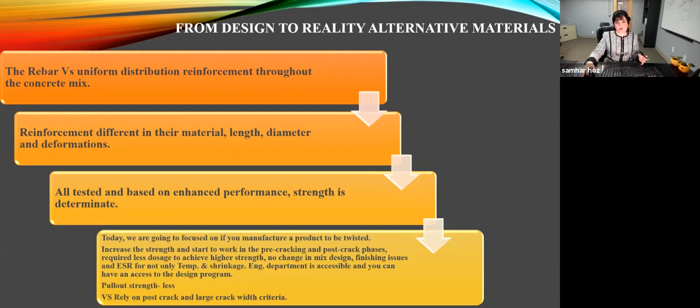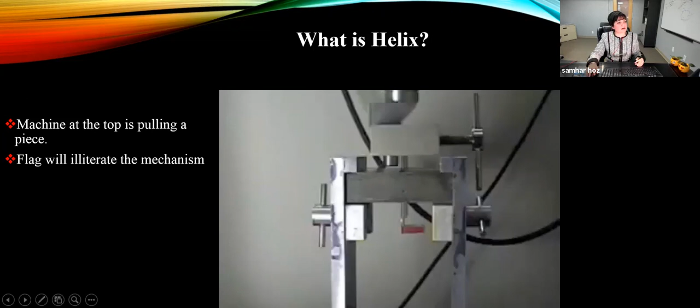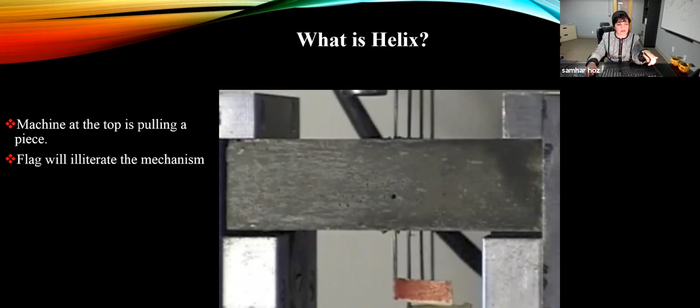So we're still with what is Helix - let me show you quickly here. This is a video with a concrete beam, and the machine at the top is attached to one piece of Helix, and the machine is going to try to pull Helix out of the concrete. The flag at the bottom is actually attached to the same piece from the other side, so you can see the flag turning as the product untwists and is pulled out of the concrete. Remember, this performance is for one piece - typically you have more than 11,000 pieces per pound.

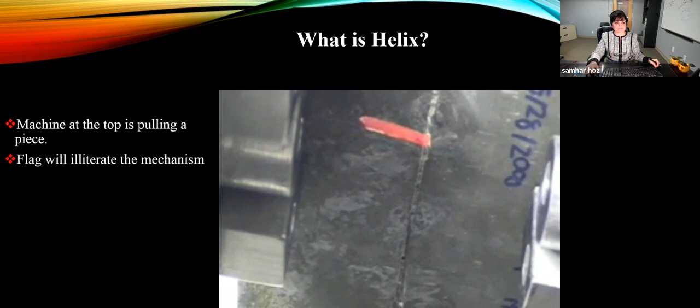So how does Helix affect concrete behavior? As I mentioned before, I'm originally a rebar designer, so this slide is key for me to modify my way of thinking in reinforced concrete with Helix. The drawing on the left shows the conventional section, and the drawing on the right is Helix reinforcement.

Conventional sections do not behave as a true composite system since concrete must first crack before reinforcement becomes active. On the other hand, Helix performs as a composite system with the concrete - adding a quantity of Helix distributed throughout the concrete section provides a multi-directional reinforcement network and creates a ductile system. This significantly changes the failure mechanism of concrete from sudden, brittle failure resulting in complete damage to the concrete, into a ductile system that's more resistant to cracking and localized damage.

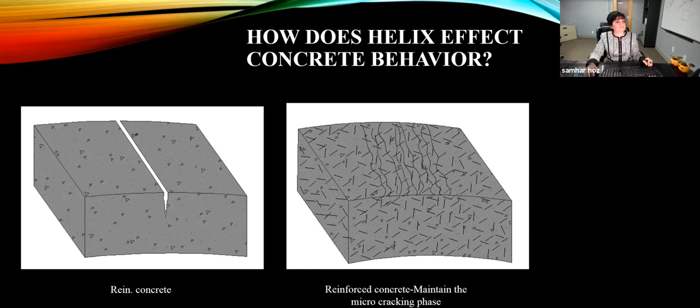So for structural performance, you get a sense that the more Helix you add into the concrete, the more strength you will get. You'll get increased flexural capacity, increased first crack strength or modulus of rupture of concrete, durability and toughness, and of course a lot of increase in shear strength. This increase in all of those aspects results in a better performing, long-lasting concrete structure.

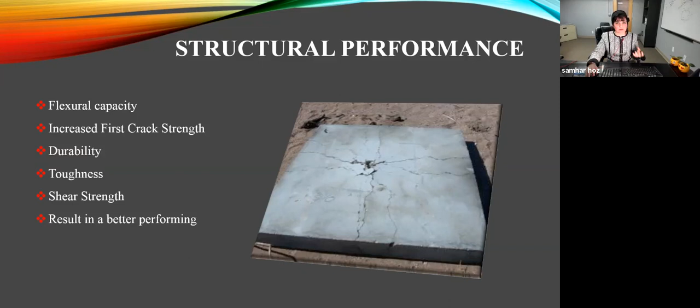So where can Helix be used? It has been used for many years now, in commercial construction, residential construction, transportation, and public infrastructure, whether it's slab on grade, slab on deck, bearing walls, shear walls, foundations, continuous footing and pad footing, cast-in-place walls, transportation, airports, and of course a lot of precast and stormwater retention.

Here we have a bridge deck replacement in Missouri, James Madison University Stadium in Virginia, and a wind farm with our partner in Australia.

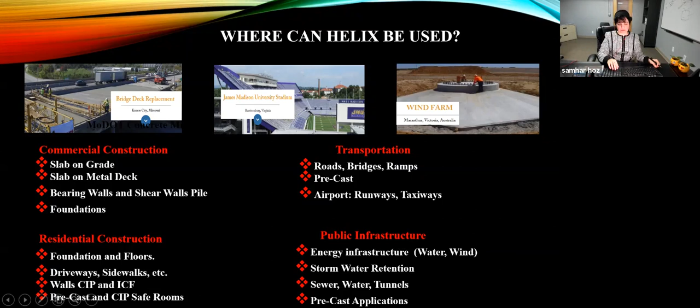All right. Too loud for you, let me know, okay?

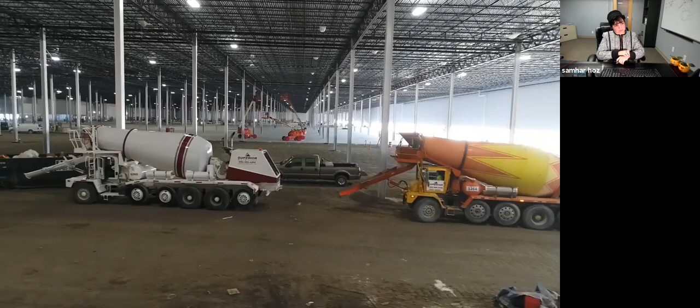Helix has been used to replace all the mesh and rebar specified.

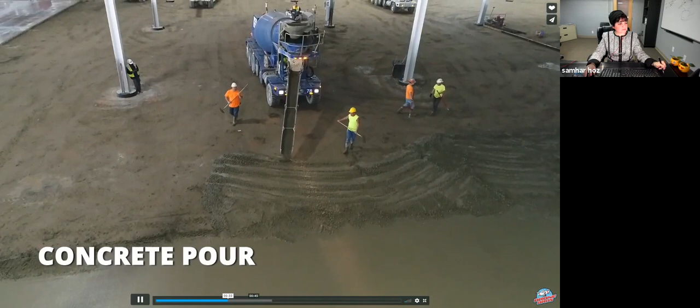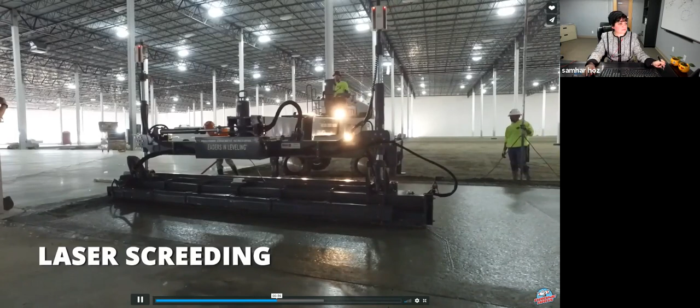Now I get a lot of questions about finishing with Helix. You can see the whole process here. Helix is a dense material, just like aggregate, so as long as the best practices for finishing plain concrete have been followed, Helix is going to sink a little bit, just like aggregate, and there will be a thin layer of cream that develops at the top and covers the Helix, just like aggregate.

Now for this project, we kept joint spacing the same, typically based on ACI 360. It's like 2 to 3 times your concrete thickness, but we can provide extended joint spacing if you want to.

Actually, I went to the actual job site. It was really interesting to be in.

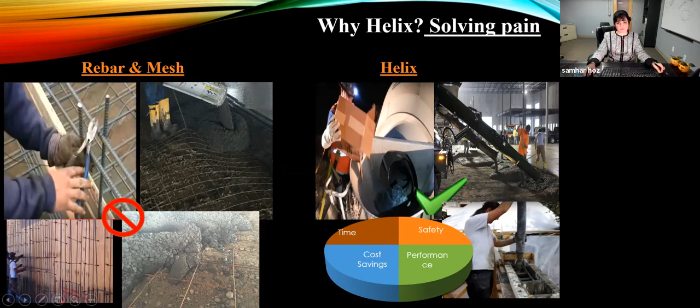So let's look at this quick video about Helix users.

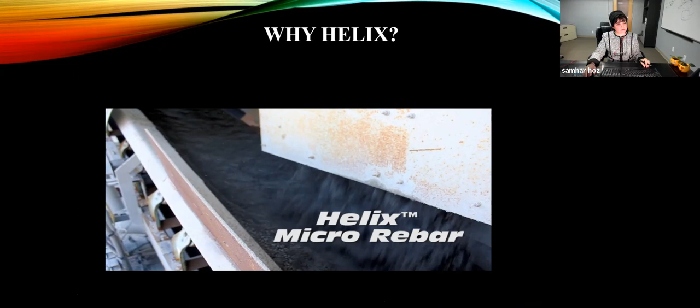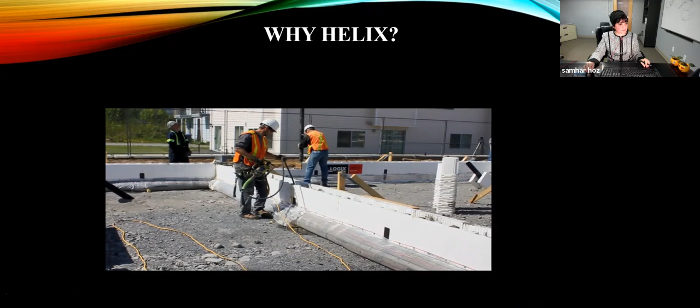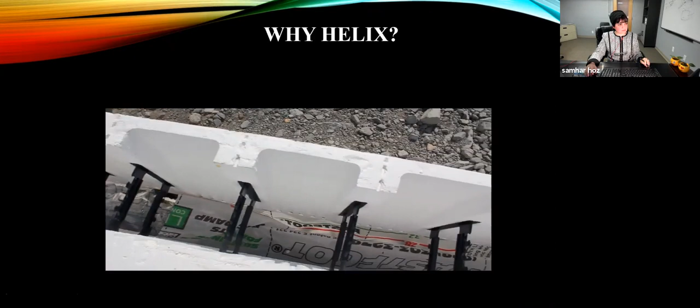Hi, I'm Bob Deeks with RDC Fine Homes, and we're here in Squamish at the Valkyrie's townhouse site. What is really exciting today is that this is the very first time the construction industry in British Columbia is using the Helix steel additive. What that has done for us is we've been able to eliminate about 90%, 95% of the rebar in the forming process, and it's actually significantly reduced our cost. So we're very excited about this opportunity, and we're looking to use this system for all our work going forward.

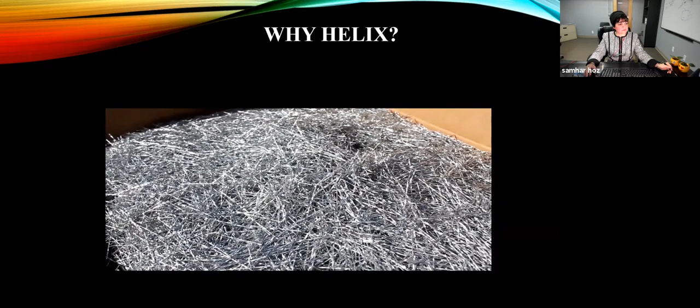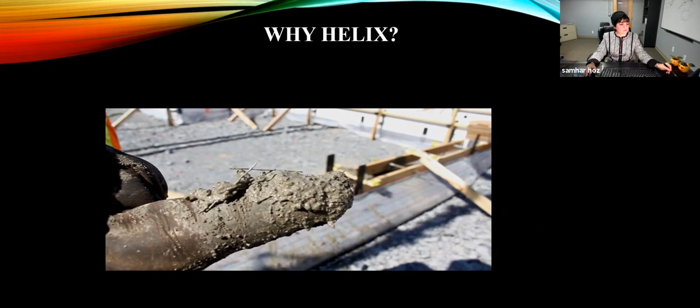Helix is actually a micro rebar. It's metal wire that's twisted, and it acts identical to rebar in concrete. It's 245 KSI steel, extremely strong. The nice part about Helix is it adds reinforcement to the concrete even before the concrete wants to crack. The reason is Helix actually makes the concrete flexible. At higher dosages of Helix, you can actually flex and bend the concrete without a dominant crack forming. That way, in an earthquake environment, with the building shaking back and forth, the concrete has a lot more drift capacity before it reaches a failure mode.

A lot of times, if the rebar is in the wrong spot, you've lost more than half of your strength in the wall. Helix solves that problem totally. The reinforcement is from side to side, top to bottom. It's all the same. The wall is as strong as it could possibly be.

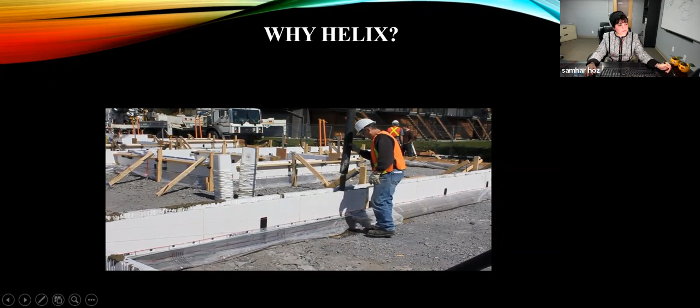My name's Rob, I'm from Coquitlam Concrete. We're loading this Helix fiber in the loads today.

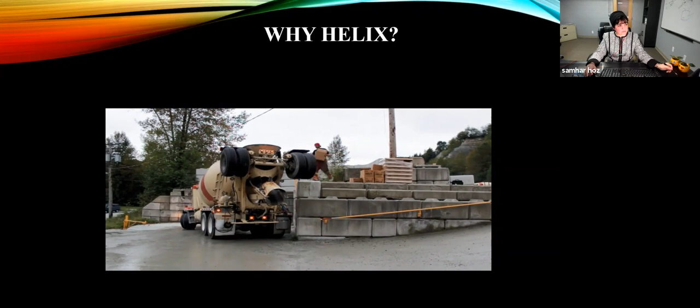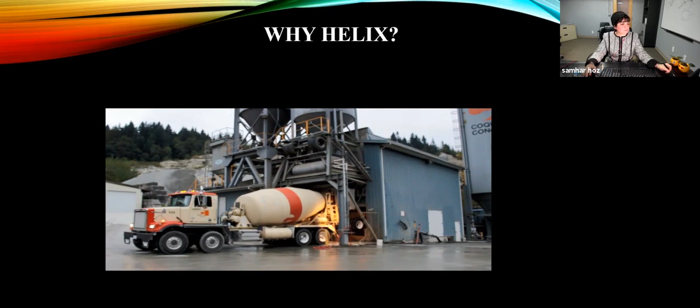What we're doing is the driver's going out to our transfer wall, the fiber's getting put in the truck, then we're adding in the water to the load when the truck's under the plant. The truck's then mixing up for 6 minutes just with the water and the fibers. Once that's complete, we tell the driver to wind it up and we load the concrete into the truck as we usually do. The driver goes to the rack and slumps it up, and that's it. Then they're good to go.

Hi, I'm Rick, and we're going to go through some of the mixing instructions later on. I'm from Summit Concrete, I've been doing concrete for 30 years, and today we're just placing 35 meters of concrete.

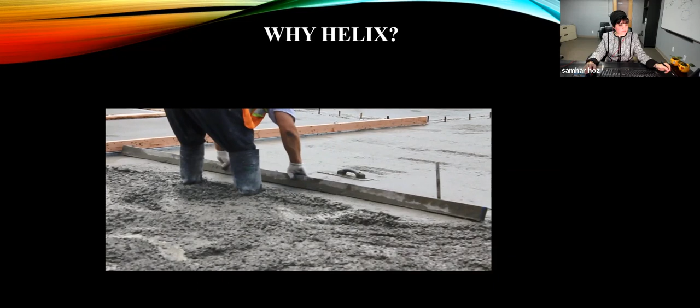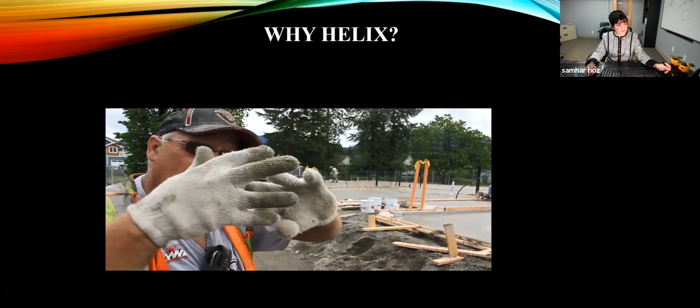Well, that's the thing, like a job like this, normally you'd come up and there'd be a wire mesh, like a 6-inch grid. While you're placing, you try and pull it up, and a lot of times it just gets stomped down to where it's ineffective, it's not doing anything. I can see how the strength of it is going to be more beneficial than a wire mesh. Wire mesh is just going to be running in one line, where this is going to be creating all kinds of different reinforcing.

It hasn't affected us in any way of placing, doesn't seem to be affecting us any way of finishing. So yeah, it's a good product, really good.

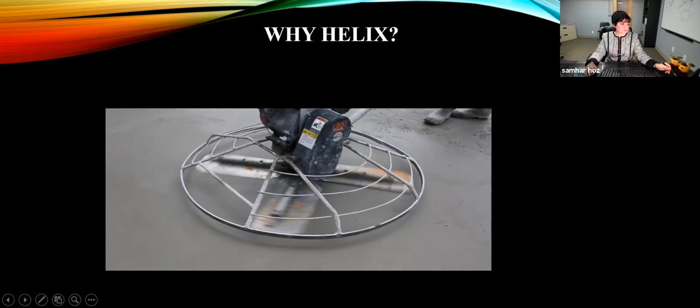For all of those projects, we typically involve our Helix engineering department in the design process. We have a great sales team who will follow up with any meeting required in between up to the construction process. The Helix micro rebar replaces the conventional rebar on the wall.

Their engineers write an equivalency for that rebar, and it's simply a fine mesh of helical twisted, small little twisted bits of metal that are interspersed throughout the foundation system at about, I think it was 25 pounds per meter. So there is no grid of rebar on this wall, there's just the Helix micro rebar.

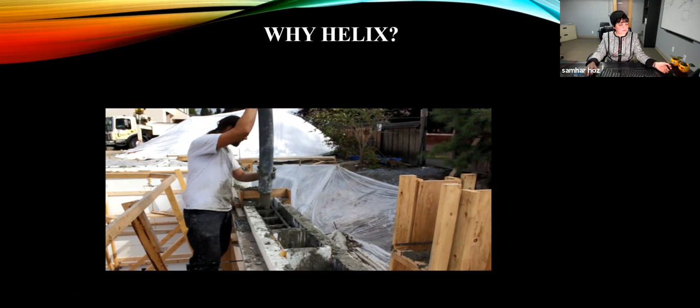We have done some conventional rebar around door openings and window openings that are over and above that 16-inch grid, but it was maybe 500 linear feet of rebar that went into the wall.

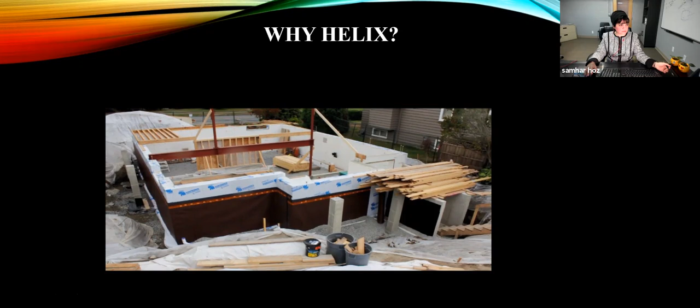The Helix micro rebar does have a cost to it, but I figure, and this is an estimate, that we probably save 20 to 30% on our rebar install, and a lot of wear and tear on our guys, which is important to me as well.

No rusty hands, no rust in your cuts, no infections, no tie wire tearing your skin all up. So guys go home refreshed, they're not as beaten up at the end of the day, and they're able to work that much better the next day, sort of thing.

We used a Helix mix in the concrete here.

Typically to tie the rebar in something this big, there's 160 feet of 12-foot high wall, would take 2 days for 2 guys. So that is taken right out of the picture altogether with the Helix mix.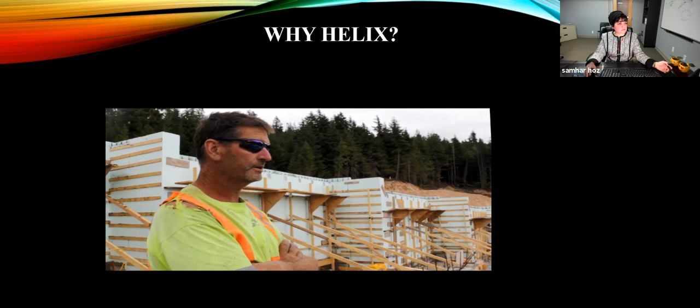It's just a super system, super time saver, and from a business standpoint, that's what it's all about. So I just look forward to keeping going on doing this and not going home tired at night. All right.

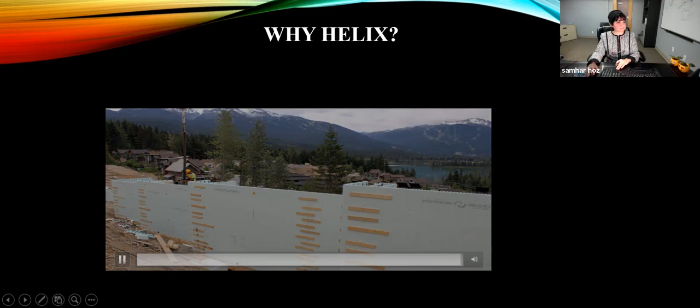You don't want to hear them again.

All right, so how does Helix resist corrosion? And that's the typical question I get each time I do a presentation.

As we all discussed, Helix reinforced concrete creates a ductile concrete matrix and has the ability to resist, to carry load prior to concrete cracking.

This mitigation of cracks in concrete prevents corrosion altogether, since this limits the availability of moisture, which is essential to sustain the corrosion. Now, if concrete undergoes cracking in an extensive environment, moisture may enter the concrete and contact with the Helix. As I mentioned before, it is zinc, which acts as a sacrificial anode to electrical current.

So the zinc coating will corrode first, which protects the rest of the steel from damage. This allows the integrity of the Helix pieces to remain intact.

Now, the last two factors for defense are the small size and the discontinuous nature of Helix, which allows for possible corrosion to occur in extensive environment in some of the pieces without resulting in spalling of concrete, as shown here, since the volume of steel is not large enough to allow the volume increase necessary to spall concrete. And as we all know, spalling of concrete eliminates the reinforcement protection and is a major cause of corrosion.

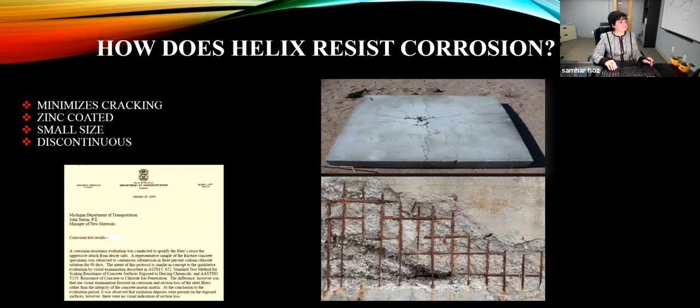So some mixing instructions. Let me show you here. We have a quick video on mixing with Helix. Helix could be used whether it's a ready mix plant or side batching. Let me show you here. This is for ready mix.

Just in general, Helix will be shipped in 45-pound boxes. So all they need to do is just dump the boxes in and then add the water first - more than 50% of the batch water first. Mix for 45 seconds and then go back to normal manner of mixing.

Hi everyone, my name's Luke Pinkerton. I'm with Helix Steel. We're here at Doane Companies today in Ann Arbor, Michigan. We're going to be demonstrating the dosing procedure for Helix Steel in ready-mix trucks today. I think you'll find this very informative. You'll also see just how easy it is to add Helix to a ready-mix truck and get a consistent mix each time.

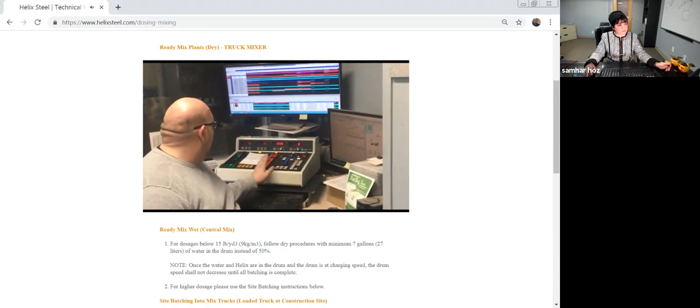Helix needs to go in at full charging speed under the chute. Alright, hey, I'm Richard Harden, dispatcher here at Doane Concrete, running an Integra dispatch command batch system. What we're going to do here is throw a little bit of water in this truck. I'm going to let the truck mix up about 45 seconds or so and then proceed with the batch. So I'm about to throw in about 70% or so of the head water and let them mix up. Anything more than 50% would be fine. I'll make sure to distribute Helix throughout the truck.

For side batching, we recommend using a 2x2 mesh or a Helix dosing machine, depending on how big your project is. All you're gonna do is make sure Helix goes into the truck in a controlled manner and breaks up any clumps. So those are some general instructions about Helix.

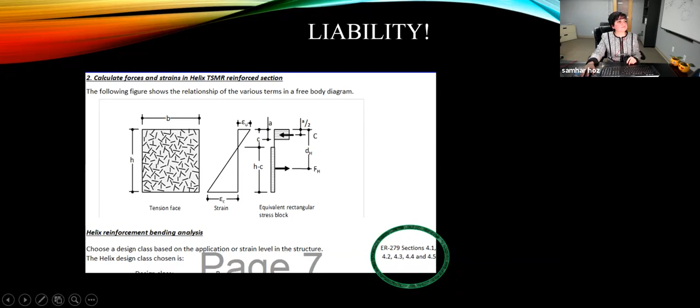So Helix design methodology development. At first we need to perform testing, which has been performed in an ISO accredited laboratory. And then we need to establish resistance functions and variations, force and distribution. And then we're going to have design classes, which is similar to what we do with rebar.

So if you need temperature and shrinkage reinforcement, you're going to specify light rebar or even light mesh, let's say W1.4. If structural performance is required, then the rebar dosage is going to increase. The same thing here, the higher strength you need, the higher dosage will be specified. And then we're going to have analysis and design models, and all of those three factors combined establish the Helix LRFD design method.

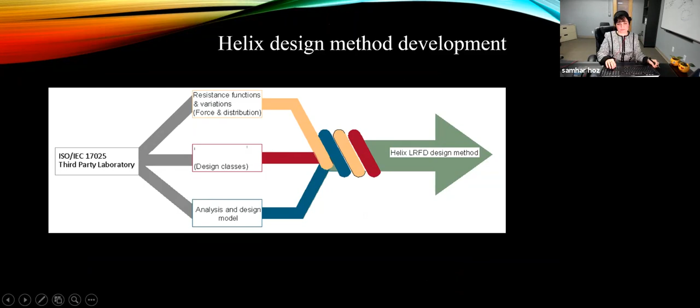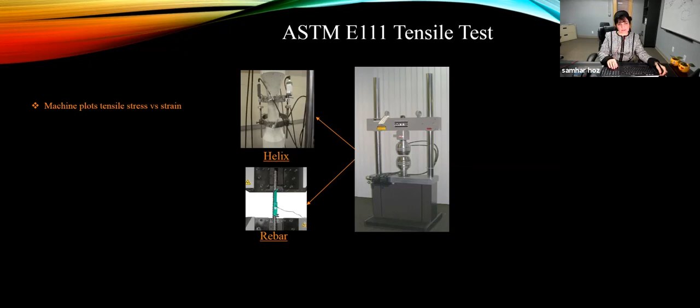So testing: Helix has been tested under ASTM E111 tensile test. The machine plots the tensile stress versus strain, and that's what we use for analysis.

So how can we design with Helix? As I mentioned before, the Helix dosage will vary based on the performance required. Within the evaluation report, there are 4 classes for design: Class A for temperature and shrinkage reinforcement, Class B for supported structures, Class C for all other structures that don't meet Class A or B.

And then we do a lot of custom design. So based on the size of the section, the reinforcement specified, or the capacity required, those classes will vary based on the design required. And there's also Class CS, which is mainly for warehouses with high racking loads or high wheel loads.

So this procedure follows the ACI 360 yield line analysis.

All right, so Helix design class selection flowchart. Just to make it easier for us or an outside engineer who wants to do their own design, we provide a flowchart in the evaluation report.

So let's say we're going to start from the start, and then the structure is soil supported, let's say it's on grade. If yes, we're going to move to the left to check whether the reinforcement is for temperature shrinkage or structural performance. Let's say it is for temperature shrinkage - if yes, then we need to use Class A. If no, we need to do additional checking and then use Class B instead.

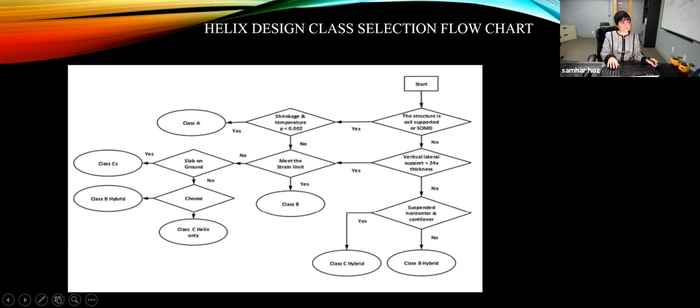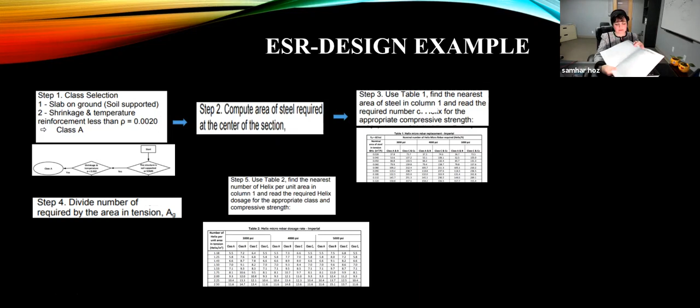So as I mentioned before, within the evaluation report, there are design examples. I'm not sure if you can see it, but here they are. It provides a few steps to determine Helix dosage using some of the tables included in the evaluation report. So step one will be to determine the design class, as we mentioned before, based on what type of strength or performance you need.

Step two will be to compute the area of steel required at the center of tension of the section. Step three will be using one of the tables in the evaluation report, table 1, which allows you to find the nearest area of steel in column 1 and read the required number of Helix for the appropriate compressive strength. Within the evaluation report there are tables for 3,000, 4,000, 5,000 psi - just because we were limited with space - but I'm going to show you a design program that will perform Helix design based on any compressive strength you use in your design.

Step 4 will be to divide the number required by the area in tension, and then we're going to go to table 2, find the nearest number of Helix per unit area in column 1, and read the required Helix dosage for the appropriate class and compressive strength. So we'll transfer from tension force required into how many Helix required per section, and then transfer that into pounds per cubic yard.

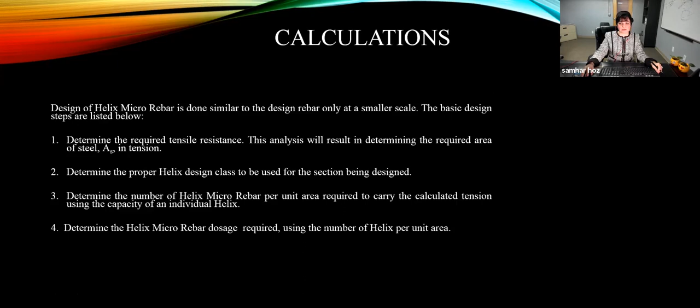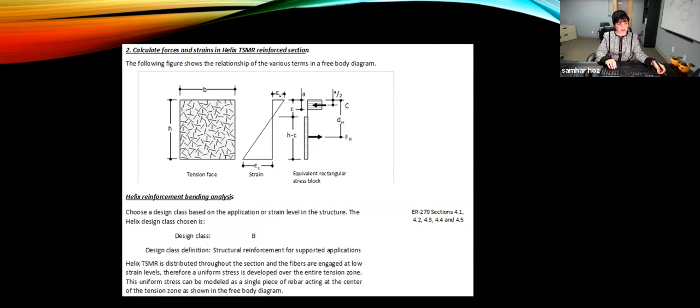Then, of course, we need to determine the neutral axis depth of helix, which is calculated based on the moment capacity of the conventional reinforcement section. Now, sometimes we can provide a hybrid design, but typically our engineers or our clients ask us to provide full replacement of rebar. After determining that, the remaining terms shown in the free body diagram are calculated as shown here.

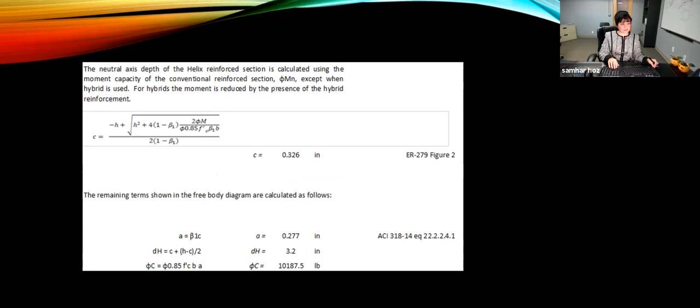Then, the fictitious area of steel required at the center of the tension zone can be calculated based on the changes in location of the centroid of the helix tension zone from the original rebar. Take that number and determine the required number of helix calculated using the following formula.

Now, this is based on the testing for helix, and those constants are the helix model constant, helix concrete strength progression term, helix bond ratio, and helix linear term. The required number of helix per unit area is calculated by dividing the required number of helix by the tension zone area, and that will give you helix per square inch.

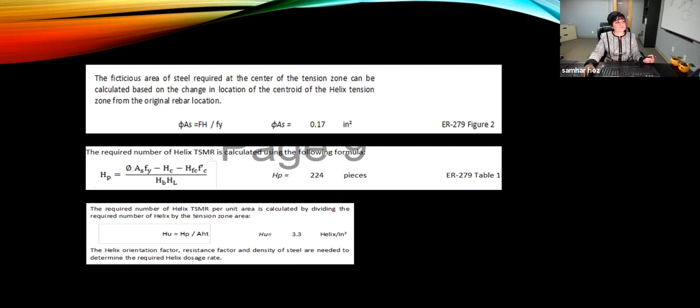And then we still need to determine the helix resistance factor by analysis of multiple sources of potential variability. Those variables include the helix dosage rate computation product, tension testing, and variability in design. So we compute the exact dosage required based on capacity, but then by applying a resistance factor, the dosage will be increased, and that's the dosage we're going to recommend using. That's the final dosage to be used.

So whether it's us at the Helix engineering department or an outside engineer, each of these tasks can be done by hand calc. But I know we are all busy. So what we've done is create a design program for Helix. Let me show you quickly here.

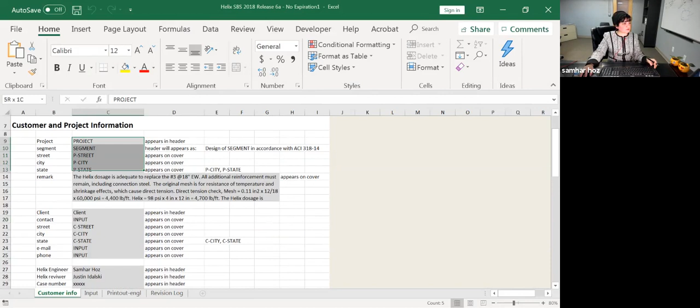So here is Helix, what we call side-by-side. This is the customer info, which we use when we send you a design, the project info, address, and any notes we have.

And then the input page—like I mentioned before, we typically get structural drawings. So based on the thickness, code used, and concrete compressive strength specified—whatever concrete compressive strength you use in your original design, that's what we're going to use with Helix. And then rebar size, rebar spacing, where the rebar is placed, whether it's 2 layers or 1 layer, and then yield strength up to 60,000.

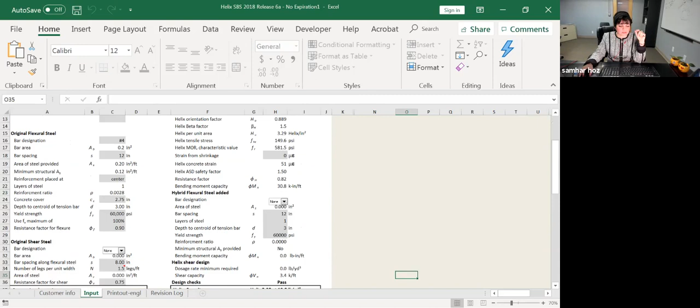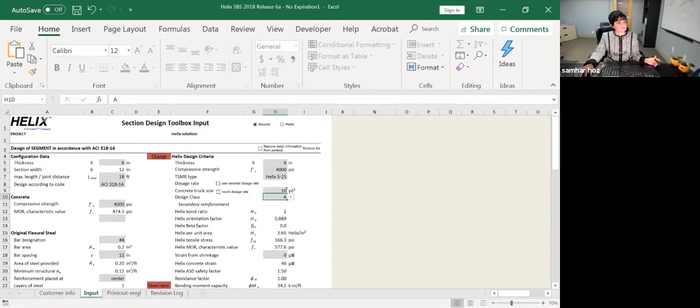Calculate the bending moment capacity specified, and then the program runs the analysis we just discussed and gives you the Helix you need. The program also runs some checks. Let's say if the class is wrong and the reinforcement is higher than required for temperature shrinkage, then the program will give a warning that the class needs to be increased.

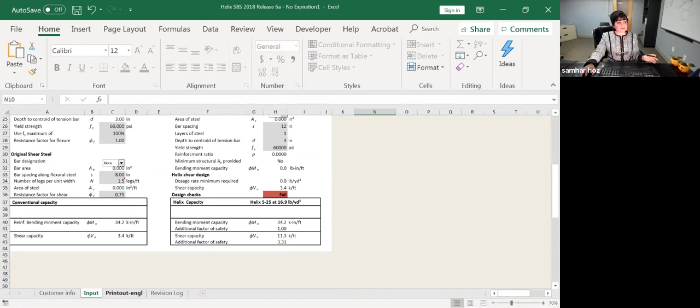The printout is the last page, the pages we send out to get approval. So there's the first page, and that's why we call it side-by-side - you have a side with rebar and a side with Helix design.

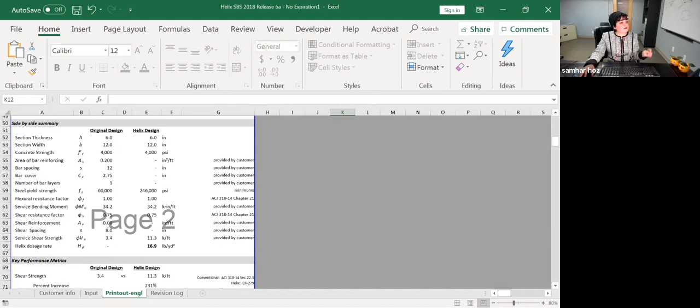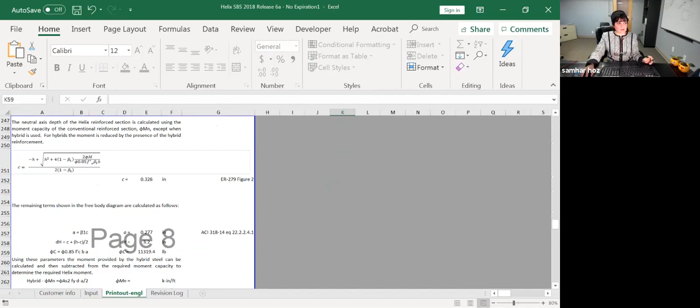After that, there will be 12 or 10 pages of calculations that give a step-by-step design along with referring to the evaluation report for each section. Here's the back computation, the Helix free body diagram, and all the computation along with referring to the evaluation report. This is the main design program we use internally here at Helix engineering department.

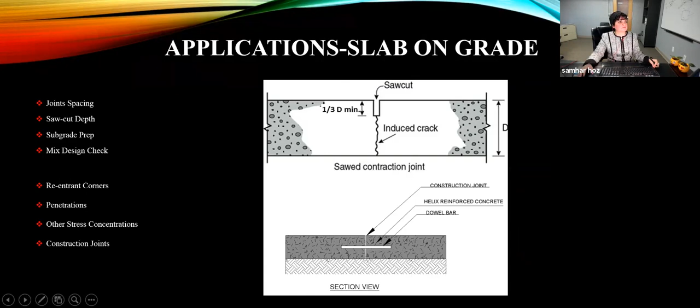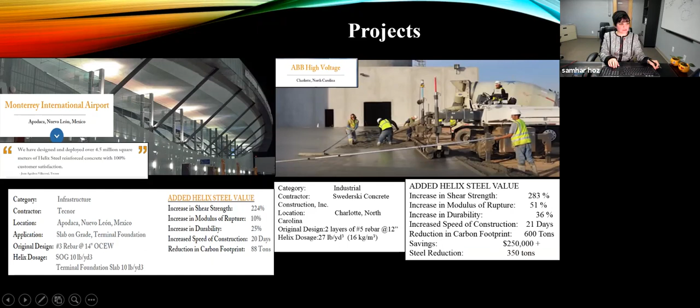Now for slab on grade specific design: how to design Helix slab on grade based on loads. If you have, let's say, a warehouse with wheel load, uniform distributed load, or racking load, you can send it to us, and we'll perform a ground-up design along with the soil condition, mainly the subgrade modulus.

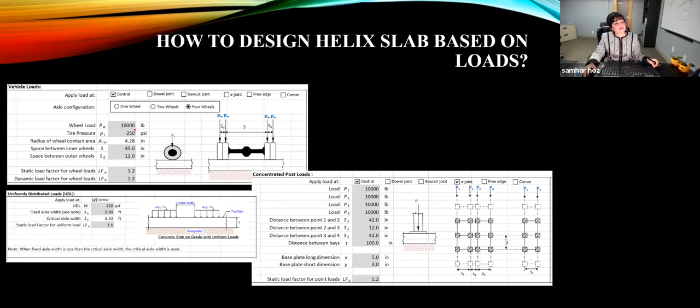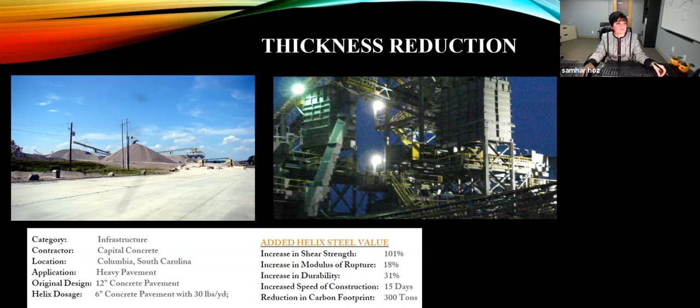The finished face of concrete - I got a lot of questions about it. Like I mentioned before, Helix is a dense material, so by applying best practices for finishing, the product will sink a little bit, and there will be a thin layer of cream covering the Helix just like aggregate.

Mixing and finishing procedure - let me show you quickly here. We have a video just to make it easier. Let me show you.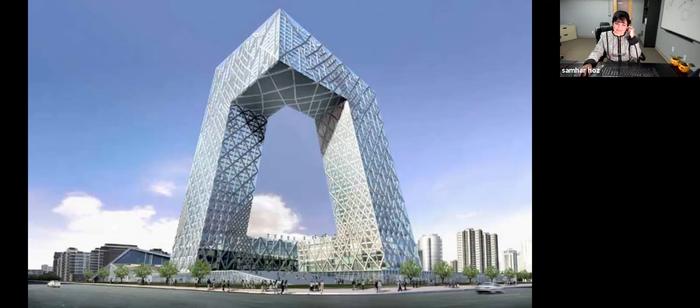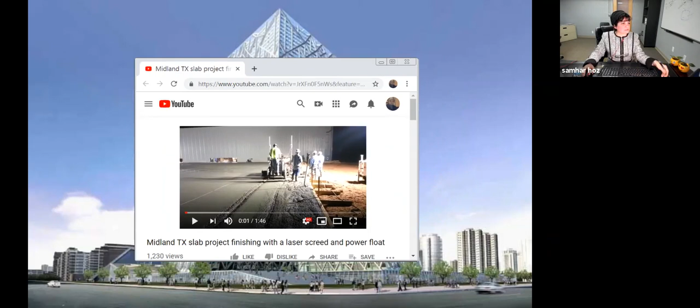Maybe not. Okay. So here's it. Well, this is the speed up.

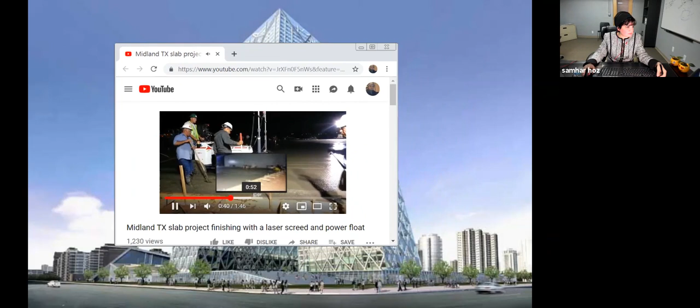At some point the gentleman is again on the surface, and you can see the finished surface. The concrete will be smooth just like you have it without Helix.

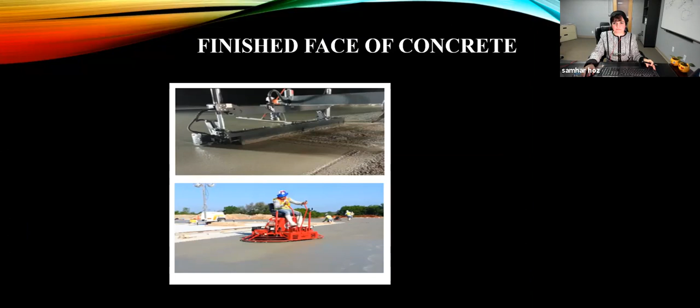Here's a closer look at the surface - rebar versus Helix, and sun recycling.

Helix has been used in a sun recycling facility. I think this is almost the last video - let me show you quickly here.

This is a sun recycling facility, and the gentleman is going to walk into two sections, one with rebar and one with Helix, and compare them. We're not sure if he's the owner or the project manager.

Recycling Center, Pompano Beach. This is the slab that is without Helix - an old slab that was poured with no Helix reinforcement. As you can see, the corners are all broken up, and the whole slab altogether is just all broken up, horribly broken up throughout the whole crack section, all the way back here.

And then this is where we come on - we've got the Helix reinforced slab that, as you can see, has been scraped and bruised and battered with many thousands of tons of scrap metal and equipment poured over it. But look at the corners again - you don't get that cracking coming off the corners like you do on the slab that is poured without Helix.

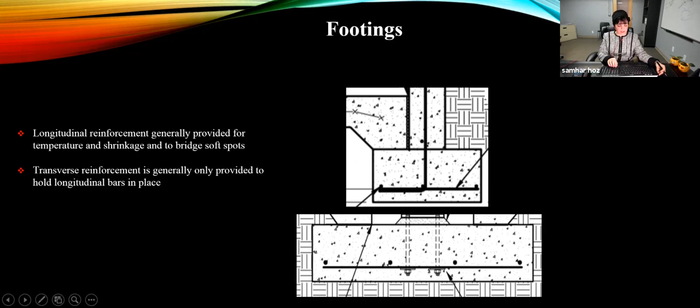Here's one of the projects where Helix have been used. This is a soundstage facility in Australia. They had, I believe, 2 layers, well, different sizes of rebar. So N12 at 400 have been replaced with 13 kgs per cubic meter of Helix along with the entire site.

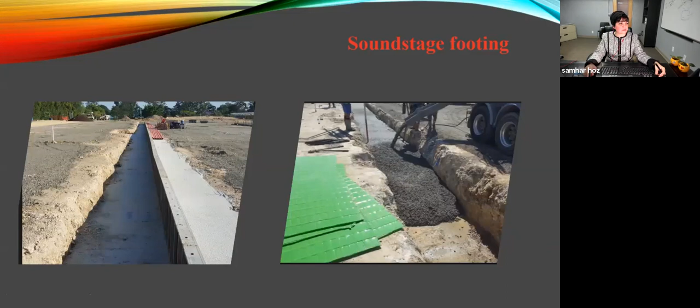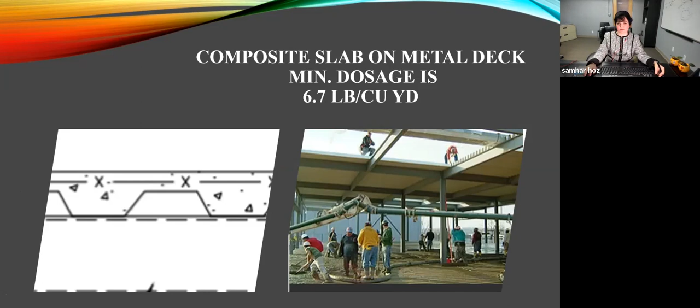Composite slab on metal decks: Helix have been used a lot in those. Minimum dosage is 6.7 pounds per cubic yard. For composite metal deck, you have the steel deck performing as the tension reinforcement, and then the concrete will be in compression. So that's how Helix replaces the mesh in it.

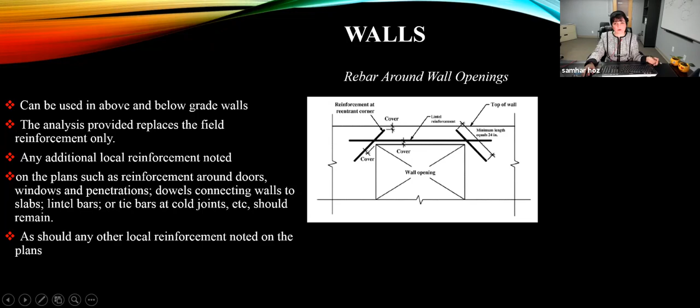Now walls: Helix have been used a lot in above and below grade walls. Just like what we do with rebar analysis, we're going to target the main field reinforcement or main capacity required. Anytime we have additional local reinforcement, because each time you change the concrete geometry you get stress concentration, Helix is going to replace the main field reinforcement and any additional local reinforcement specified on the drawing, such as rebar around doors, windows, penetrations, dowels, connecting walls, lintel bars, or any additional local reinforcement that needs to remain.

So there are some examples: this is the Hilton Garden Hotel, 18 pounds per cubic yard of Helix have been used. And here we have a Waterloo tower, a 24-story building, and those are shear walls, so they went from 2 layers of rebar into 1 layer on center with Helix dosage.

Here we have the villages in Florida. 10 pounds per cubic yard of Helix have been used to meet FEMA spec for tornado and hurricane, and this project has been going on for many years, I think 5 years or so. Over 6.5 million square feet and 122,000 cubic yards of concrete has been supported with Helix steel, which equates to 1.2 million pounds of Helix.

Let me show you here, this is just a quick test. The wall was allowed to cure for 7 days, and then backfill was placed against the wall. The backfill is important because a 12,000 pound loader was run parallel and close to the wall to apply dynamic and static compressive loads. Water was allowed to saturate the backfill for 7 days. Not only did the backfill become saturated, the soil at any point within 15 feet of the wall was saturated to a depth of about 8 inches, and no visible change occurred in the wall.

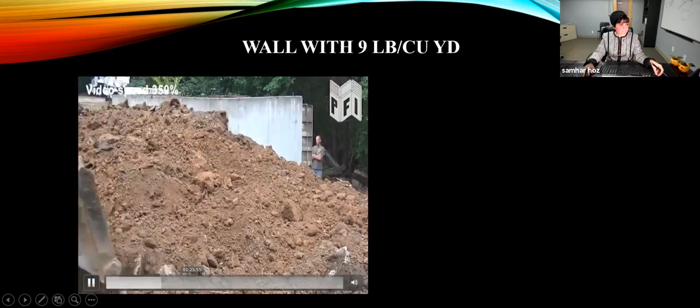It's not like an ASTM approved test, but it's like an abuse test for the wall.

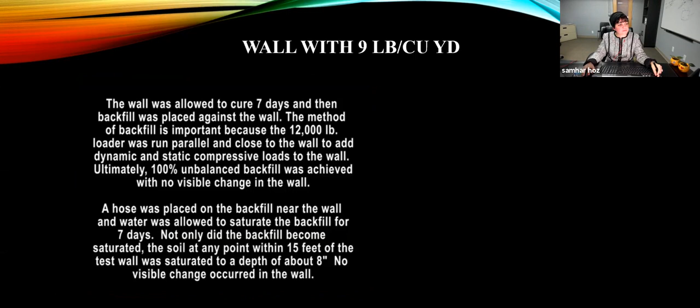At some point, they're gonna throw some aggregate. Yeah.

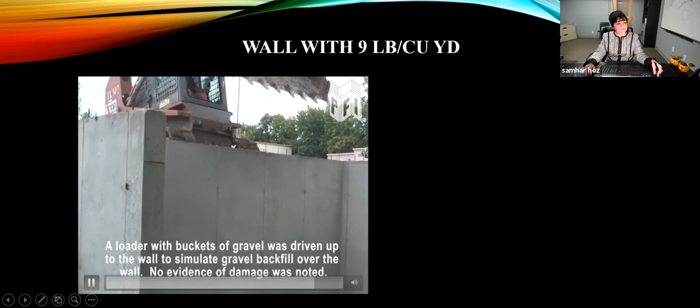So how can I get Helix design for my project? You can have access to the design program by signing an NDA, and you can run analysis if you want to. We also offer free engineering service to support our project. If you are still in the analysis process, we could run the analysis for you, and we provide 10 or 12 step-by-step calculations along with referring to the evaluation report for each section.

So to specify Helix design, this is some of the language that engineers have been using: Helix manufacturer, material, and then drawing call-outs.

So just like what we have with rebar, typically in a Helix project, it's not specified in slab on grade only. It's specified in slab on grade, continuous footings, pad footings, walls, on deck, any grade beams, any customized design we do. So what engineers typically do is have a note on individual sections and specify how much dosage is required for that specific section.

Now we typically make Helix dosage uniform throughout an individual application. Let's say if we are doing pad footings, there are typically long tables with different thicknesses and different rebar specified. So we run analysis for each one of those pad footings, and we recommend using the highest dosage, then they can just apply the entire thing with one dosage.

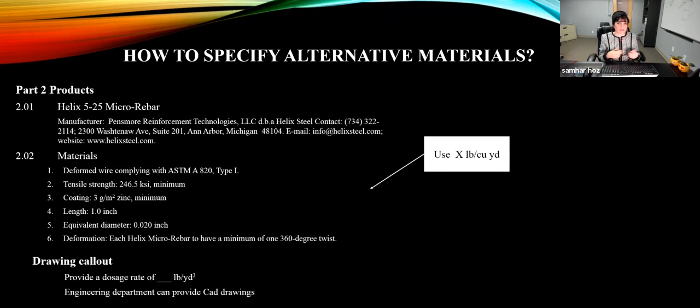That's all I have for you today, and I welcome any questions you have.

Wall foundation walls - wall designs will be customized typically. So if you're talking about basement walls, if you can give us your soil lateral load along with wall height, backfill height, then you can run a ground-up design and see how much dosage you need.